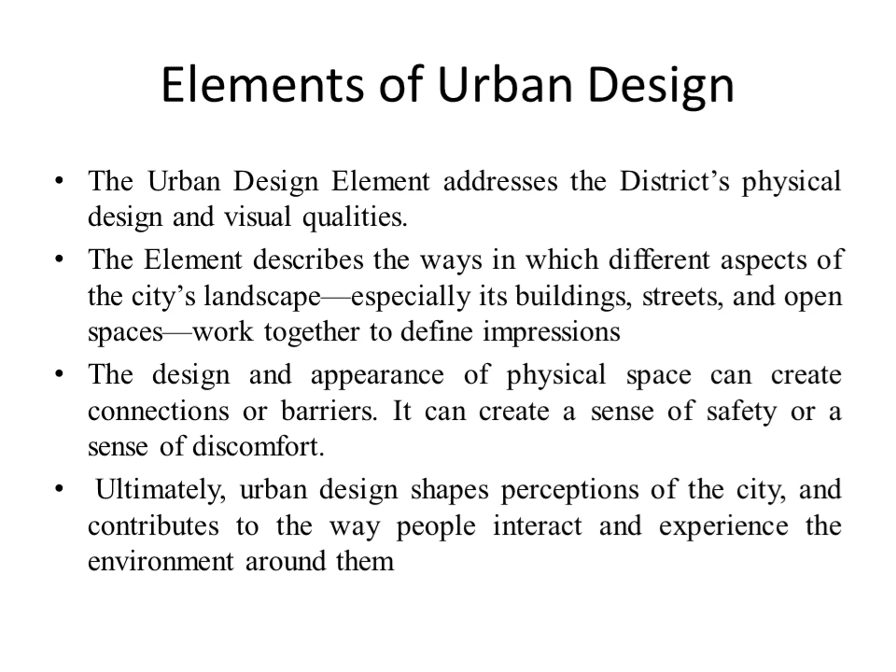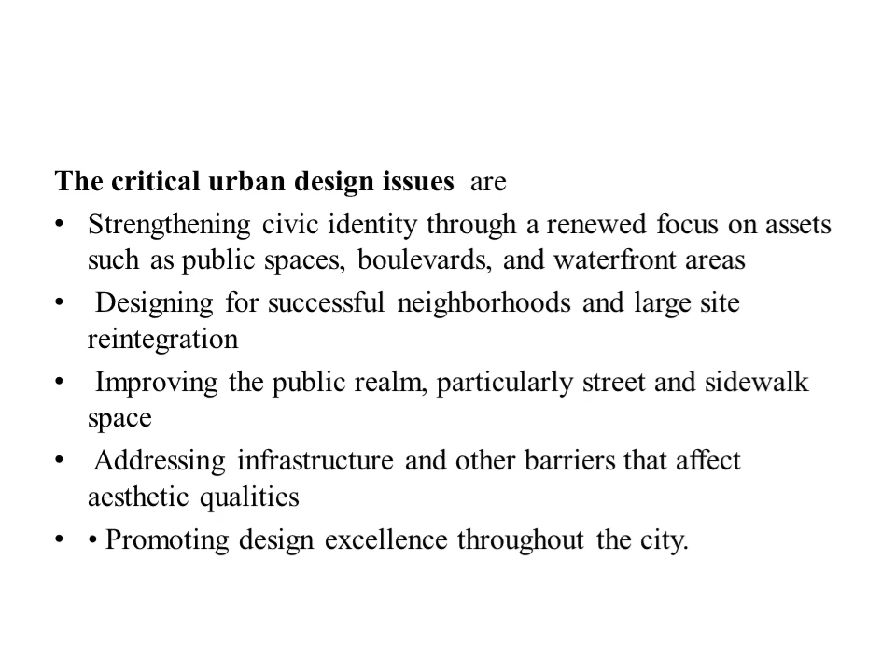The critical urban design issues are strengthening civic identity through a renewed focus on assets such as public spaces and waterfront areas, designing for successful neighborhood and large site reintegration, improving the public realm particularly street and sidewalk space, addressing infrastructure and other barriers that affect aesthetic qualities, and promoting design excellence throughout the city.

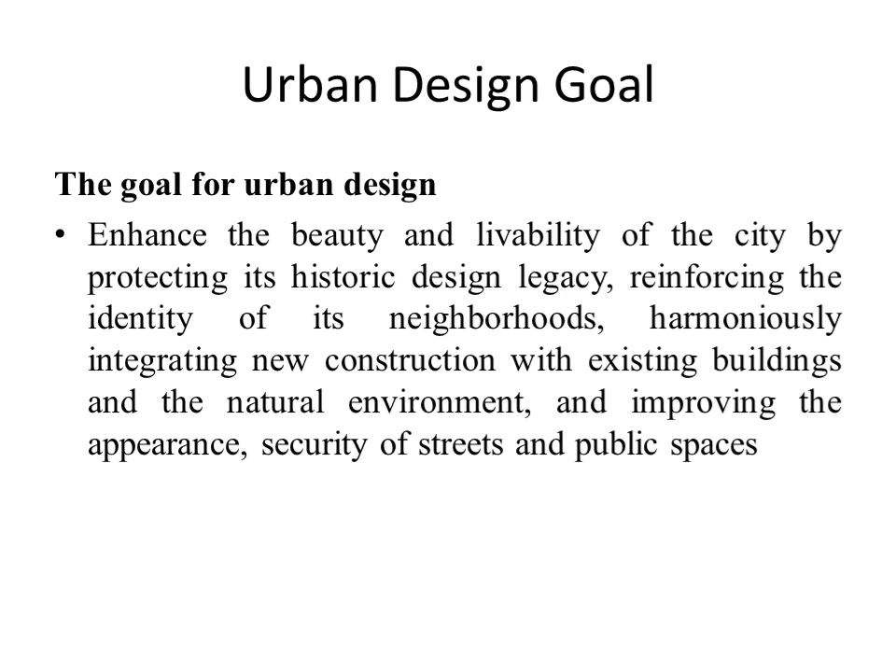Next we will see the urban design goal. The goal for urban design is to enhance the beauty and livability of the city by protecting the historic design legacy, reinforcing the identity of its neighborhoods, harmoniously integrating new construction with existing buildings and the natural environment, and improving the appearance and security of streets and public spaces.

The urban pattern and identity of the city as a whole can be achieved or maintained by protecting the integrity of the city's historic plans. Similarly, we can respect the natural topography and landform. This is also possible by improving the identity and design.

The urban pattern and identity can be enhanced by strengthening the boulevards and gateways and overcoming physical barriers.

Similarly, the urban pattern and identity of a city can be preserved through architectural continuity and design integrity of historic districts and other areas of strong architectural character.

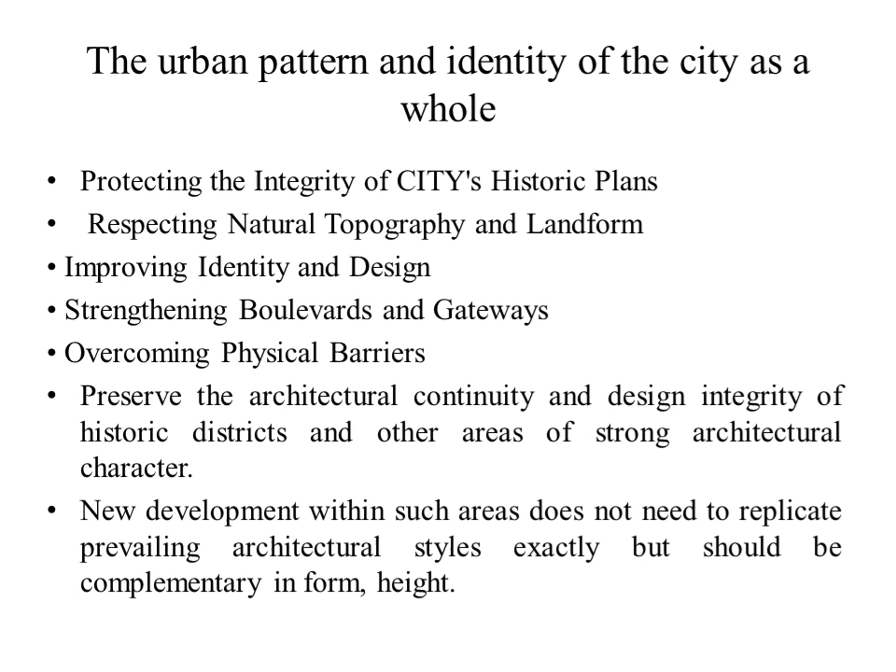New development within such areas does not need to replicate prevailing architectural styles exactly, but should be complementary in form and height. Further, it should create visual interest through well-designed building facades, storefront windows, and attractive signage and lighting.

Avoid monolithic or box-like building forms or long blank walls, which detract from the human quality of the street. Also encourage the use of shade trees and landscaping or screening of surface parking areas.

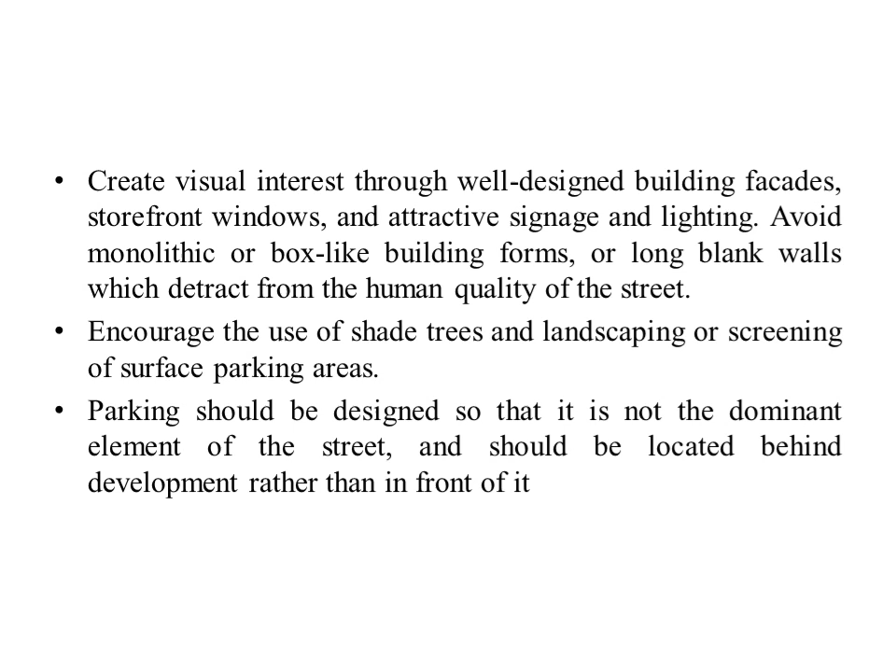Parking should be designed so that it is not the dominant element of the street, and should be located behind development rather than in front of it.

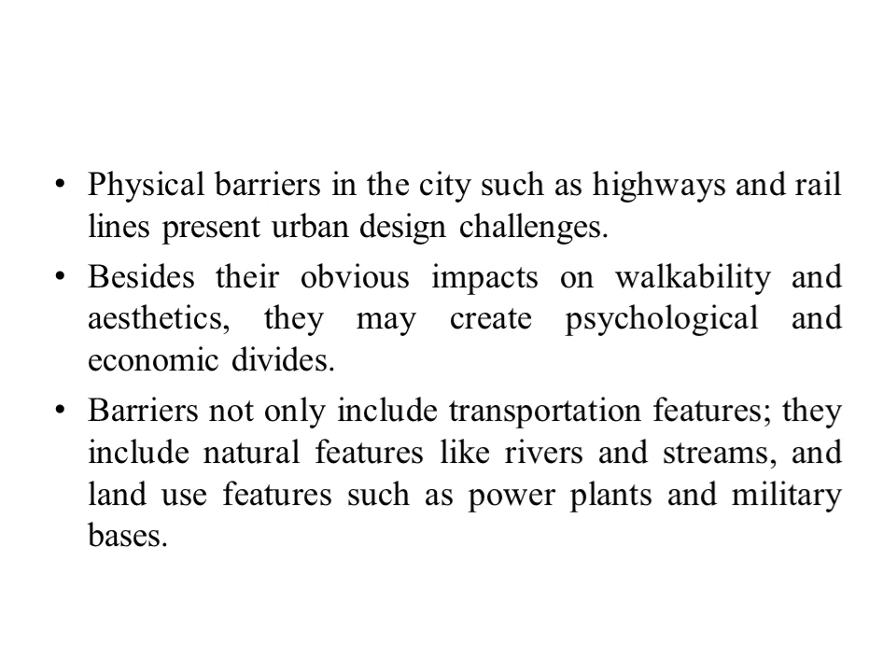The physical barriers in the city, such as highways and railway lines, present urban design challenges. Besides their obvious impact on walkability and aesthetics, they may create psychological and economic divides. Barriers not only include transportation features, but also natural features like rivers and streams, and land use features such as power plants and military bases.

In this slide, we are going to see the elements of a city plan. All the individual objects included in an urban area are the elements of the city plan. These objects include residential buildings, public buildings, parks, factories, roads, etc. Land includes built-up area and open land also.

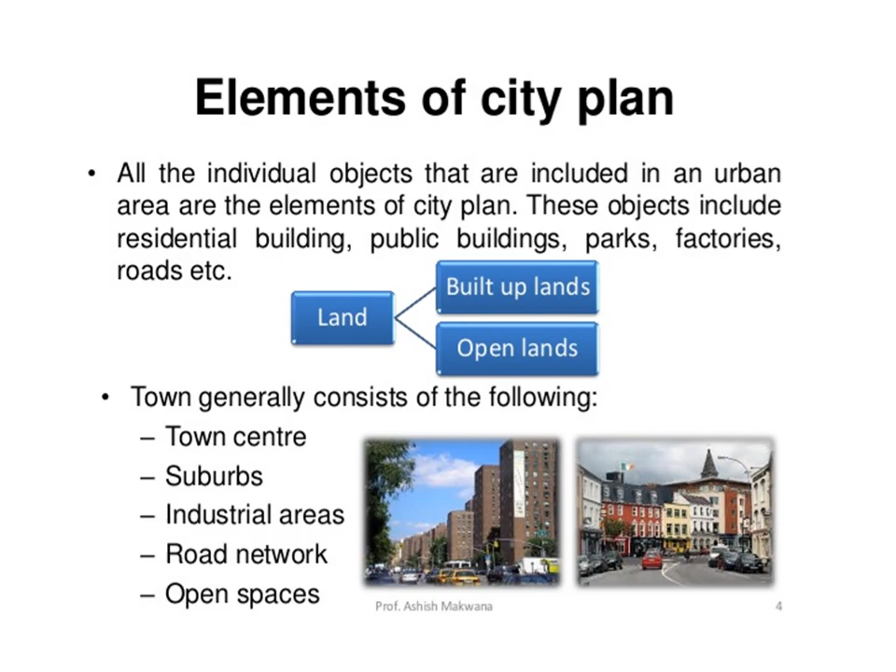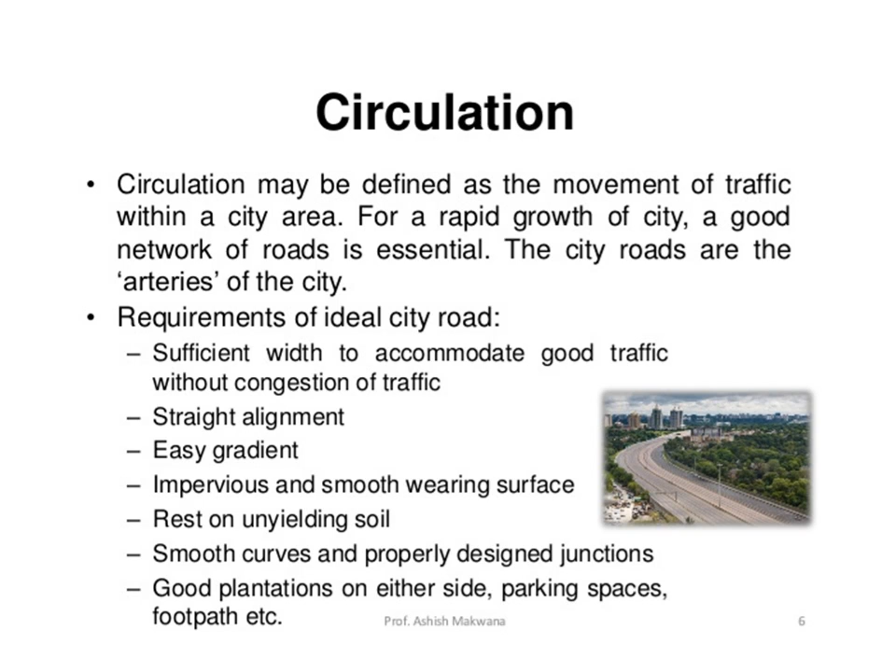Then the classification of urban roads: they are arterial road, that is main road, sub-arterial road, local roads, and other roads.

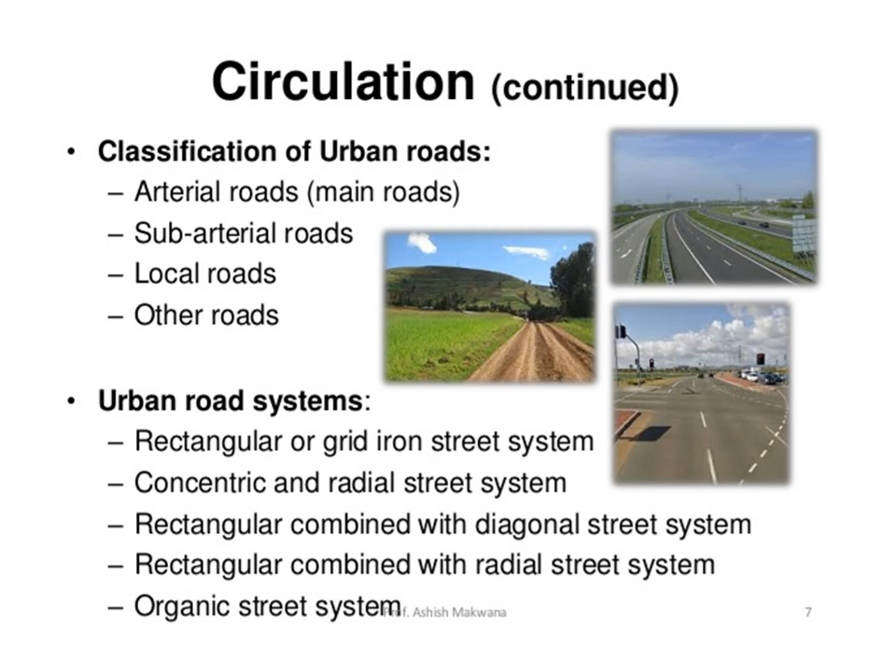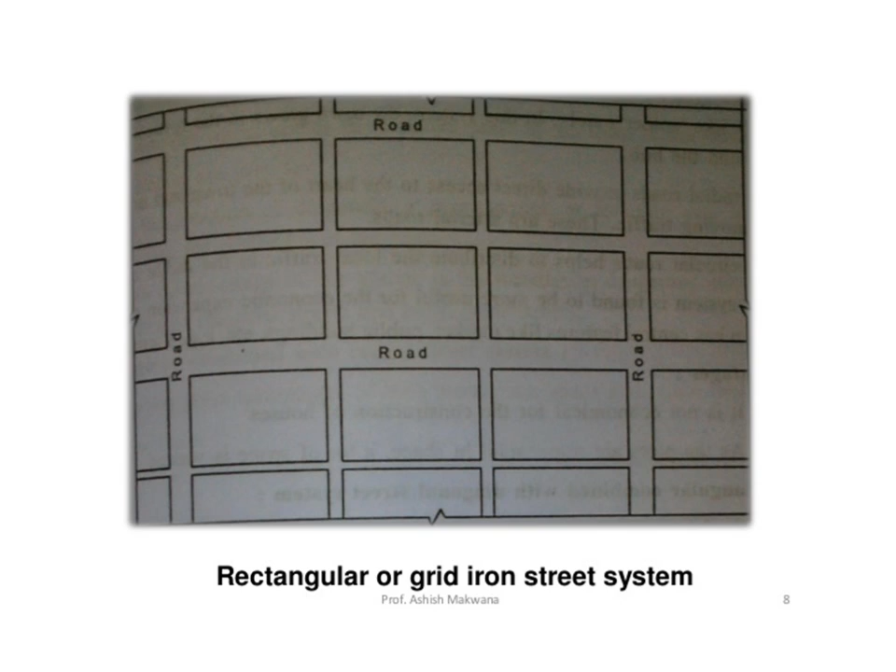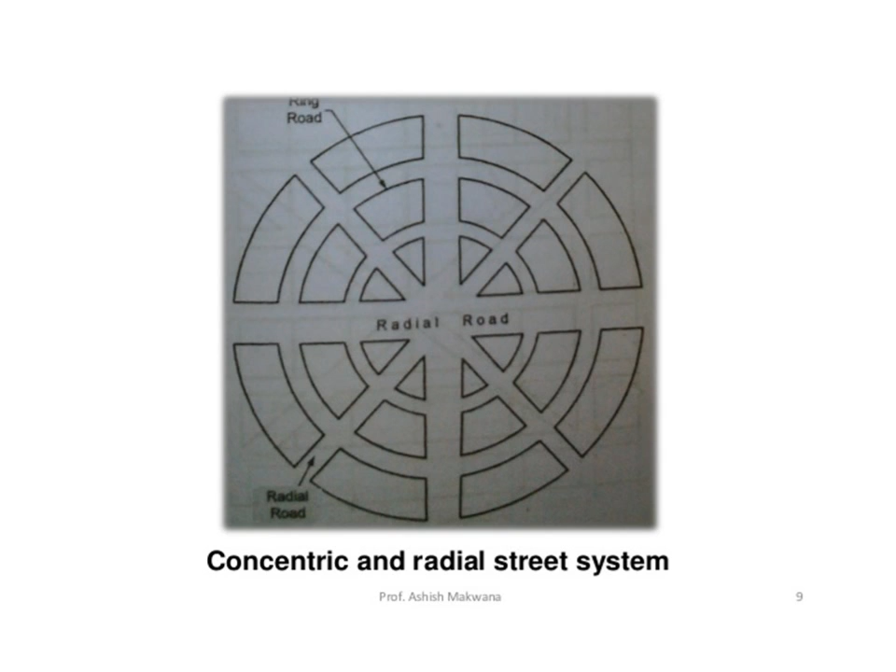This slide refers to the concentric and radial street system, where the central business district is located at the center, and concentric zones are provided from center towards the outskirts, joined by radial roads.

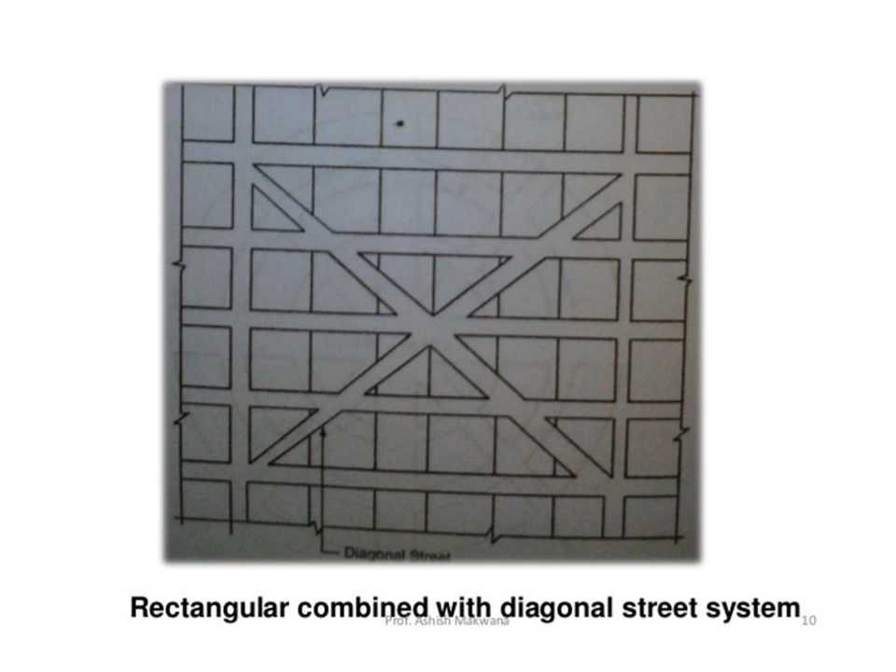This slide refers to rectangular combined with diagonal street roads, where roads run diagonally from the center and other roads are parallel to each other, connecting the different zones in the city.

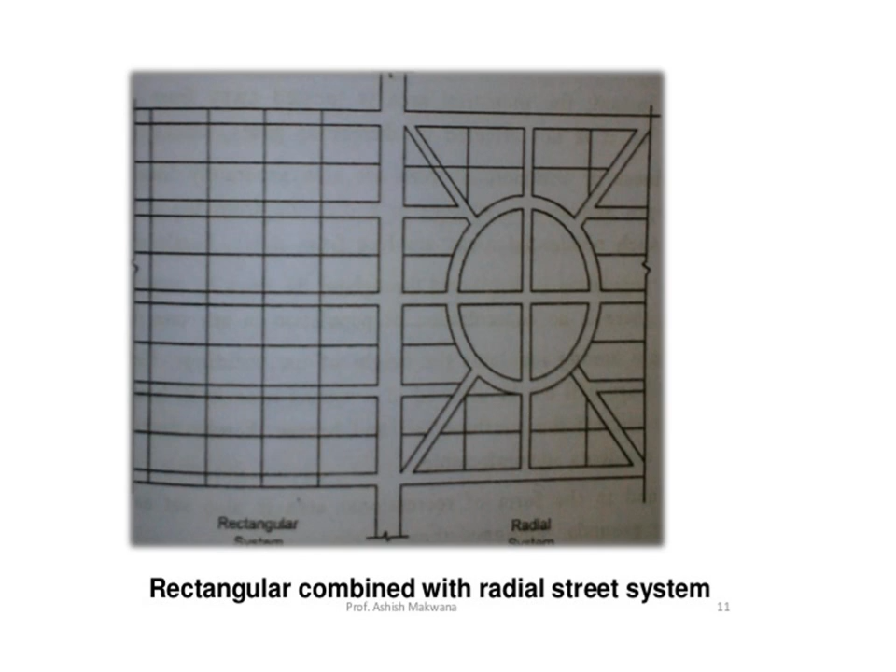This slide shows the rectangular combined with radial street system, in which on one side of the city the rectangular grid pattern is adopted, whereas on the other part the radial system is adopted, with the central business district provided at the center.

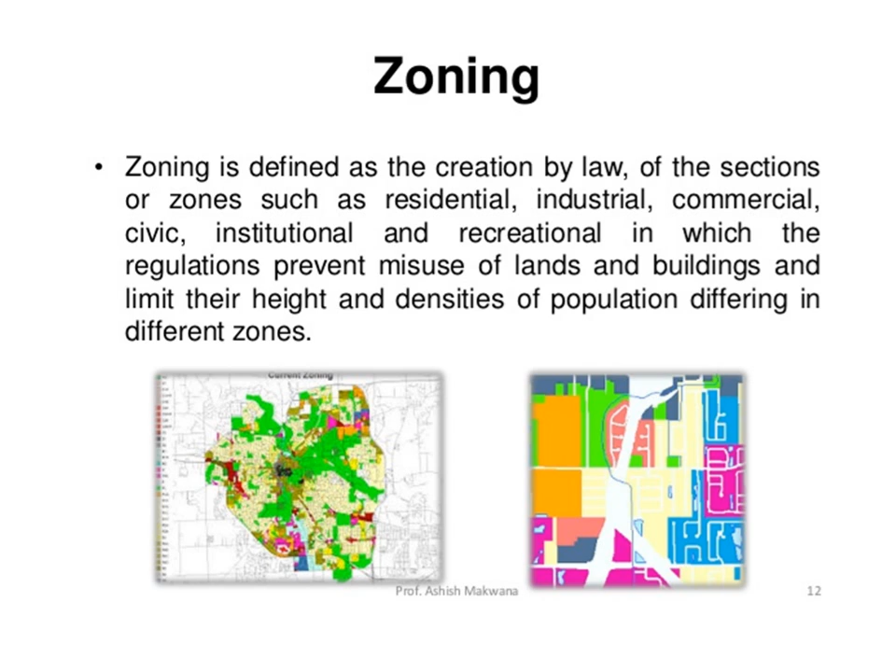Now we are going to see zoning. Zoning is defined as the creation by law of sections or zones such as residential, industrial, commercial, civic, and institutional, in which regulations prevent misuse of land and buildings and limit their height and population densities, differing in different zones, as shown in the diagram below.

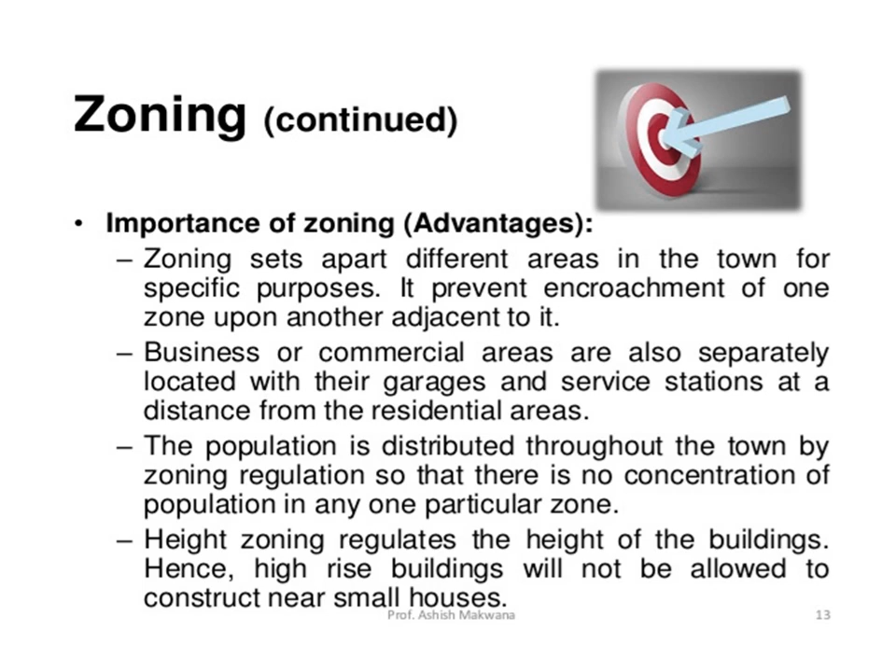Next we see the importance and advantages of zoning. Zoning prevents encroachment of one zone upon another adjacent to it. Business or commercial areas are separated, with garages and service stations located at a distance from residential areas. Population is distributed throughout the town by zoning regulations so there is no concentration in any one zone. Height zoning regulates building height, so high-rise buildings will not be allowed near small houses.

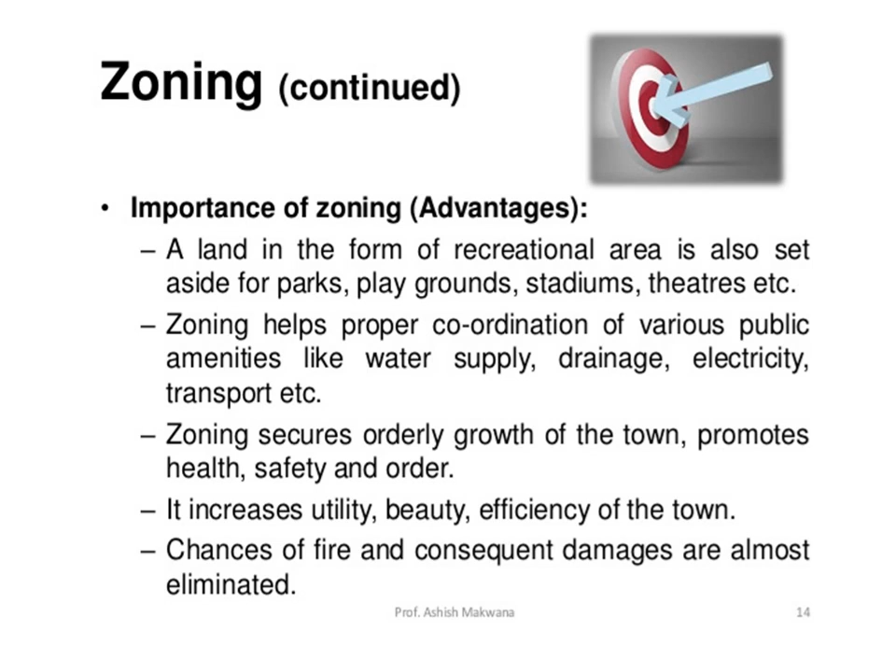Further, land is set aside for recreational areas like parks, playgrounds, stadiums, and theatres. Zoning also helps proper coordination of public amenities like water supply, drainage, electricity, and transport. It secures orderly growth of the town, promotes health, safety and order, encourages utility, beauty and efficiency, and reduces chances of fire and resulting damage.

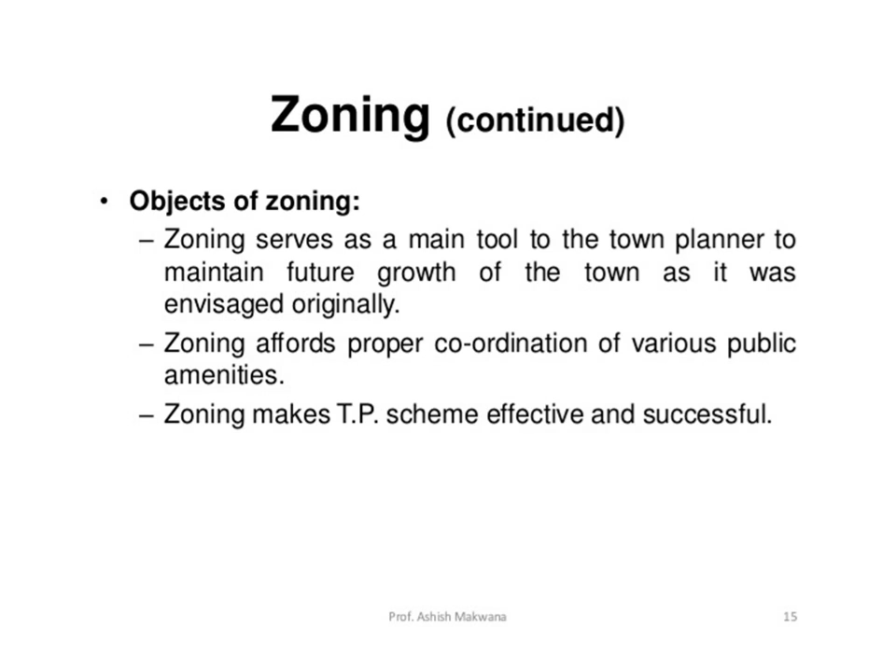Now we see the objectives of zoning. Zoning serves as the main tool for the town planner to maintain future growth of the town as it was envisaged originally. Zoning affords proper coordination of various public amenities and makes town planning schemes effective and successful.

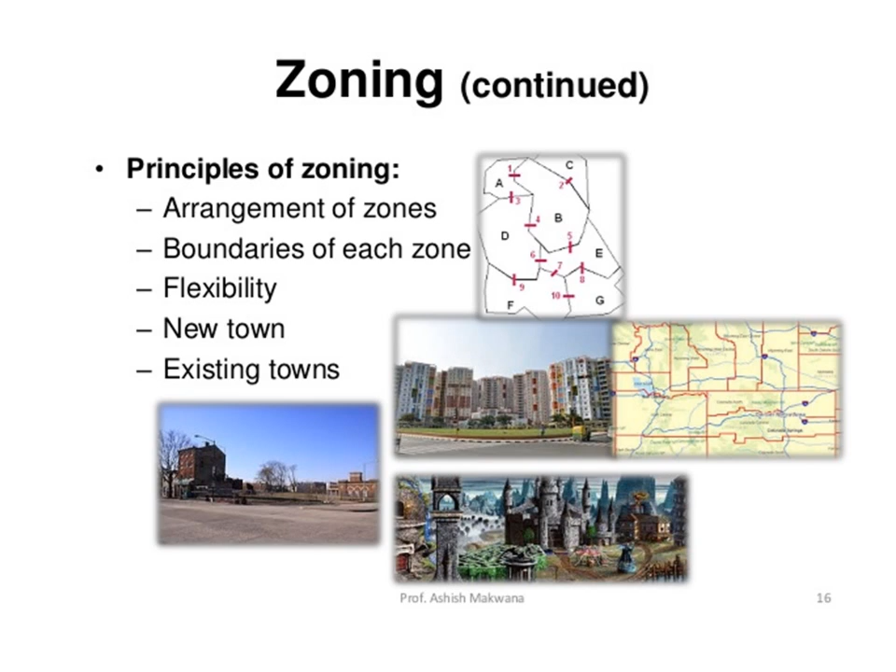In this slide we see the principles of zoning. It includes the arrangement of zones, boundaries of each zone, flexibility, and considerations for new towns and existing towns.

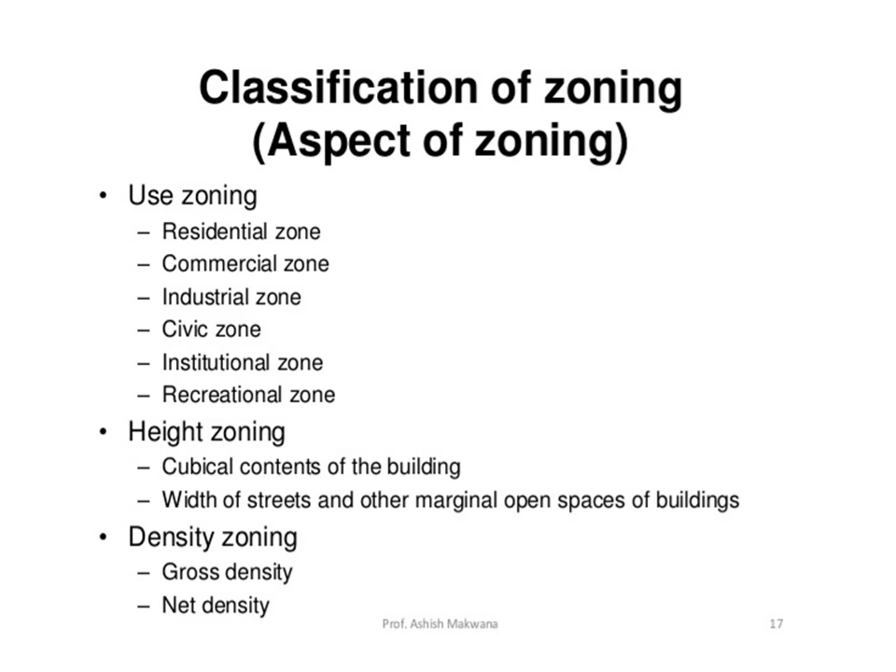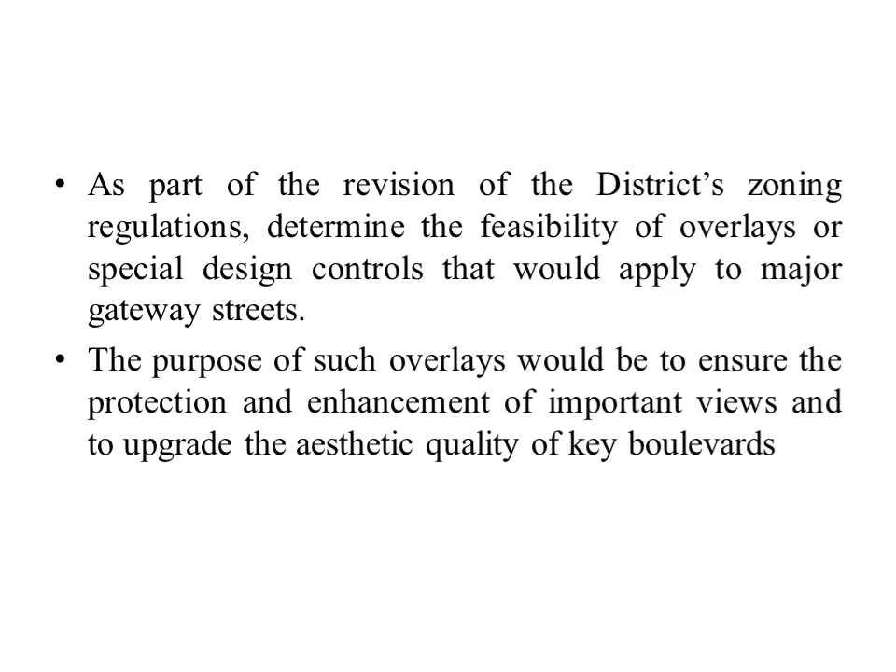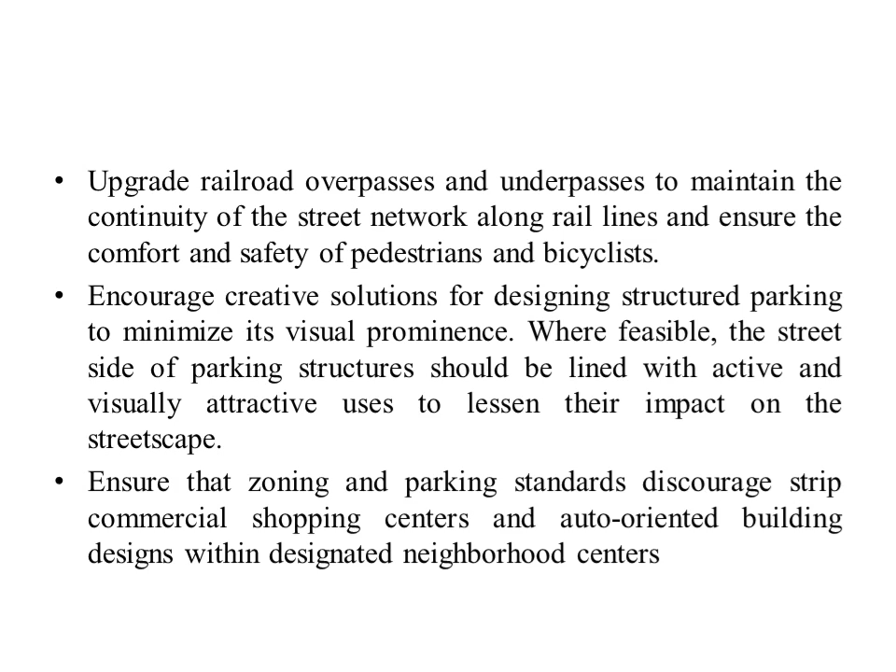Further, the design of street space affects pedestrian safety and comfort. Changes to street and sidewalk width, parking configuration, crosswalks, intersections and signals can improve the pedestrian environment. Well-defined edges and limited openings create a sense of enclosure which can make a street more animated and comfortable.

Also, street trees, street furniture, benches, trash receptacles, and lighting, along with well-designed buildings and active ground floor uses, contribute to the experience of walking, cycling and driving. Planning for streets and sidewalks must recognize the value of such spaces as public amenities, especially in high-density neighborhoods lacking access to parks, open spaces and yards.

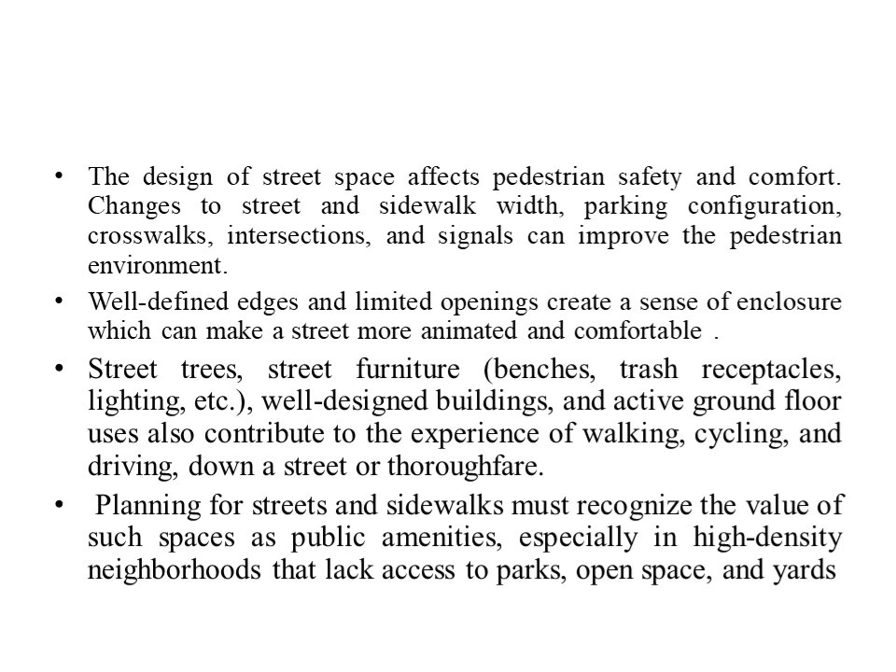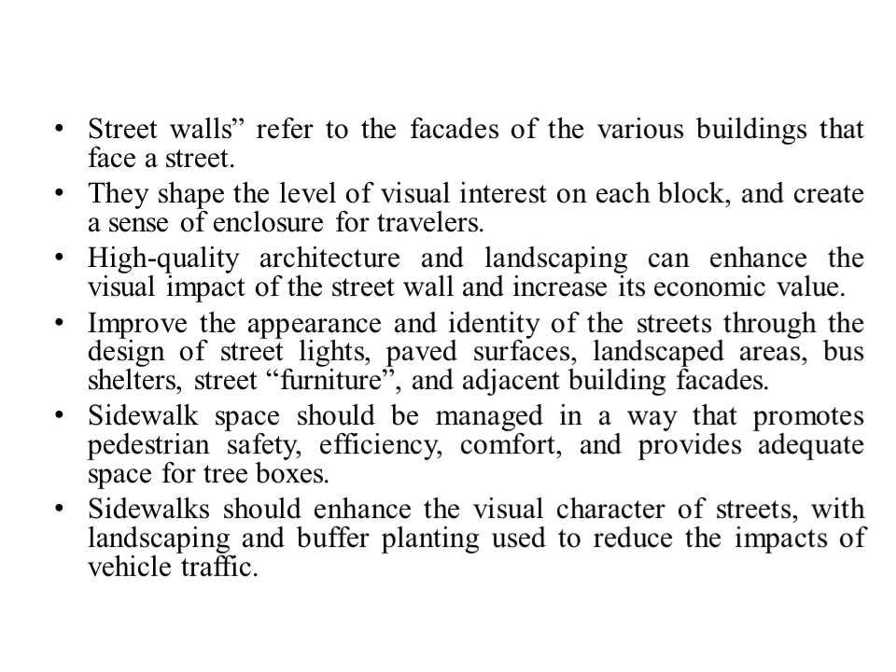So in this video lecture, we have considered the elements of town planning and how they affect the design of a town.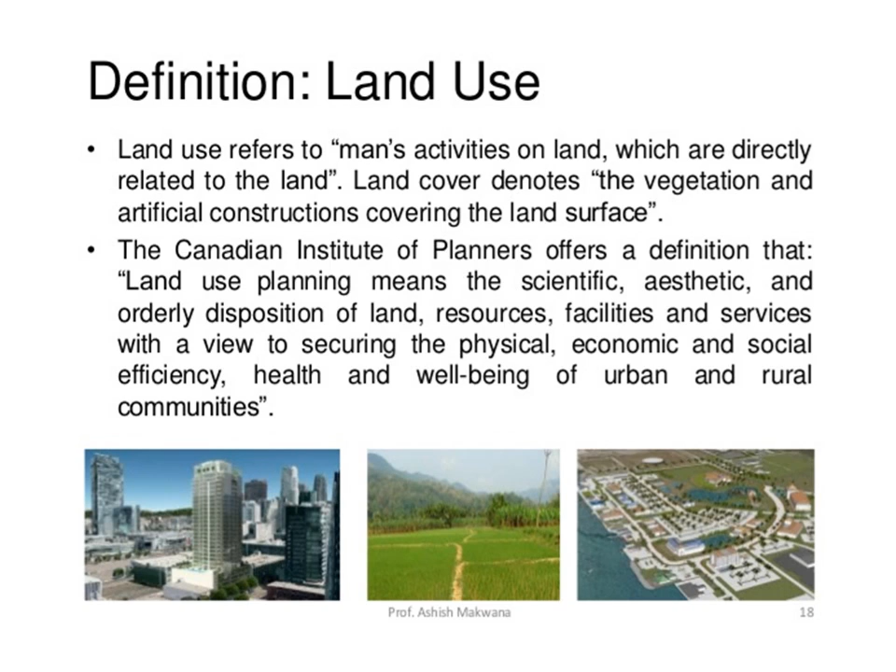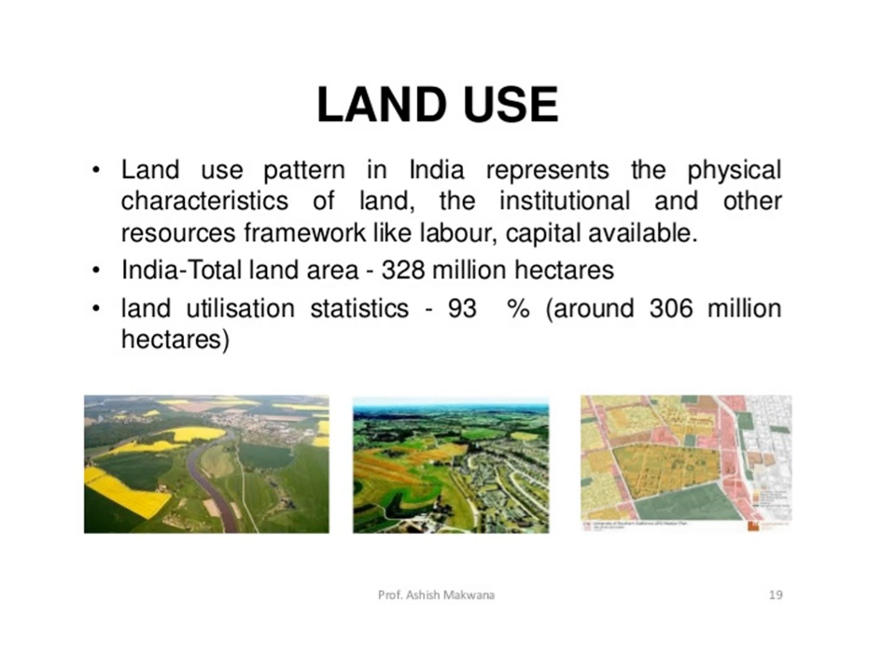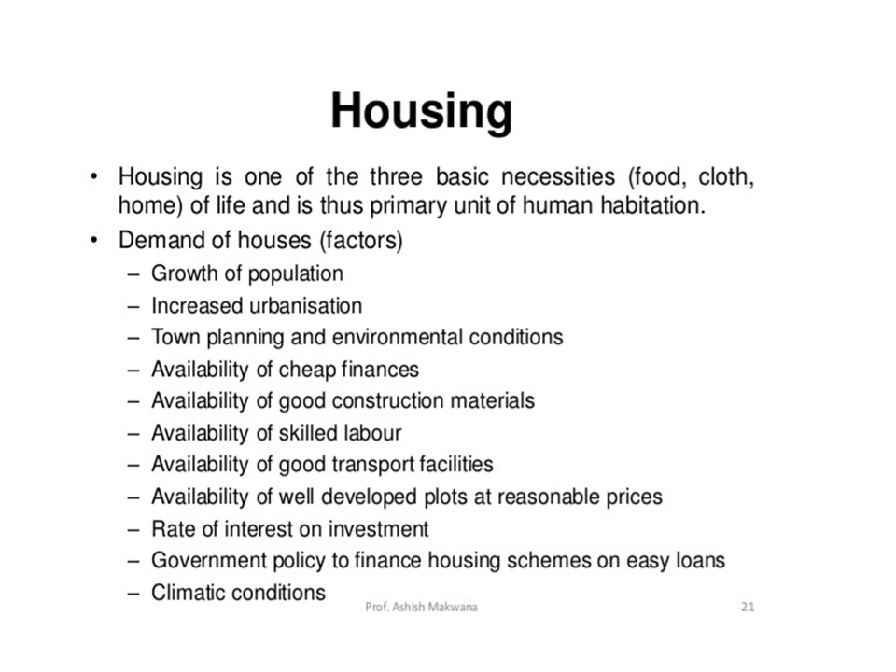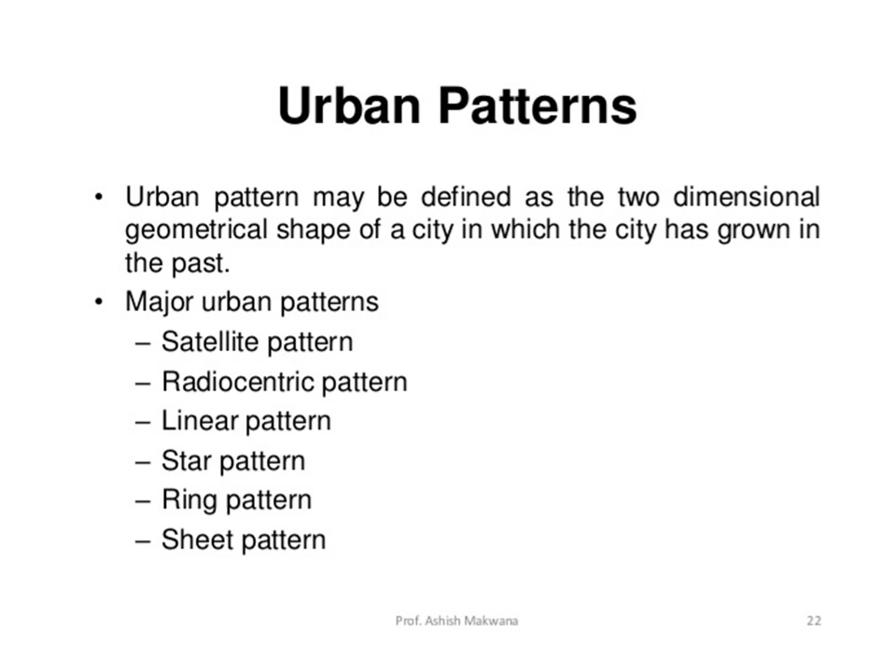The street wall refers to the facade of various buildings that face a street. They shape the level of visual interest on each block and create a sense of enclosure for travelers. High quality architecture and landscaping can enhance the visual impact of the street wall and increase its economic value as well.

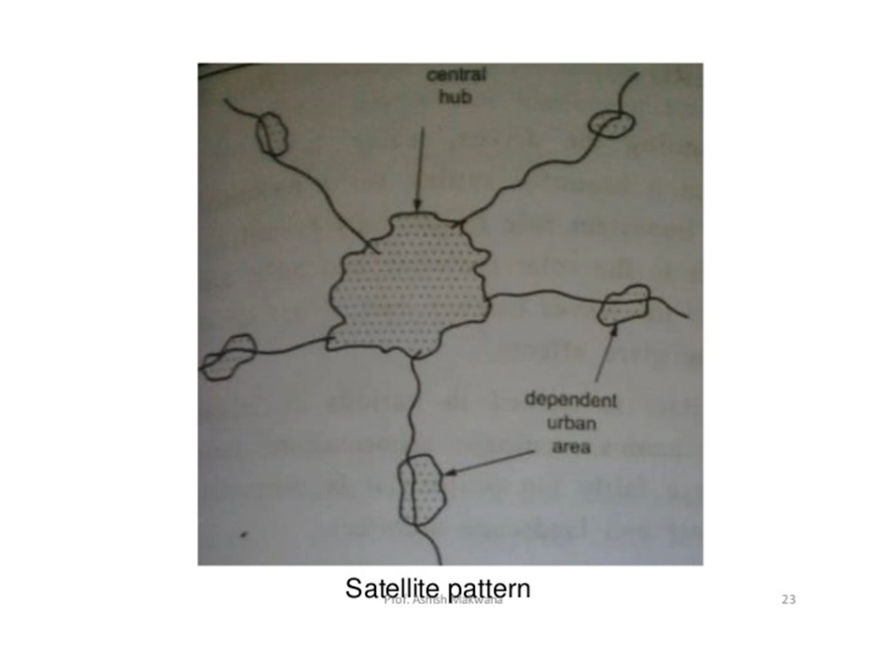This slide refers to the radiocentric pattern, in which the parent city is located at the center and radial lines or radial roads are provided from the center towards the outskirts of the city.

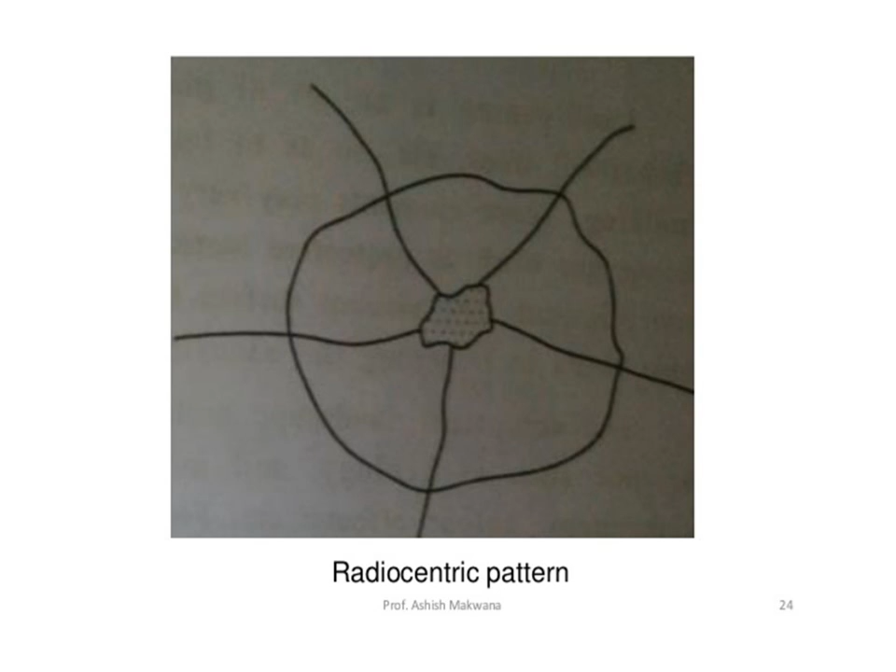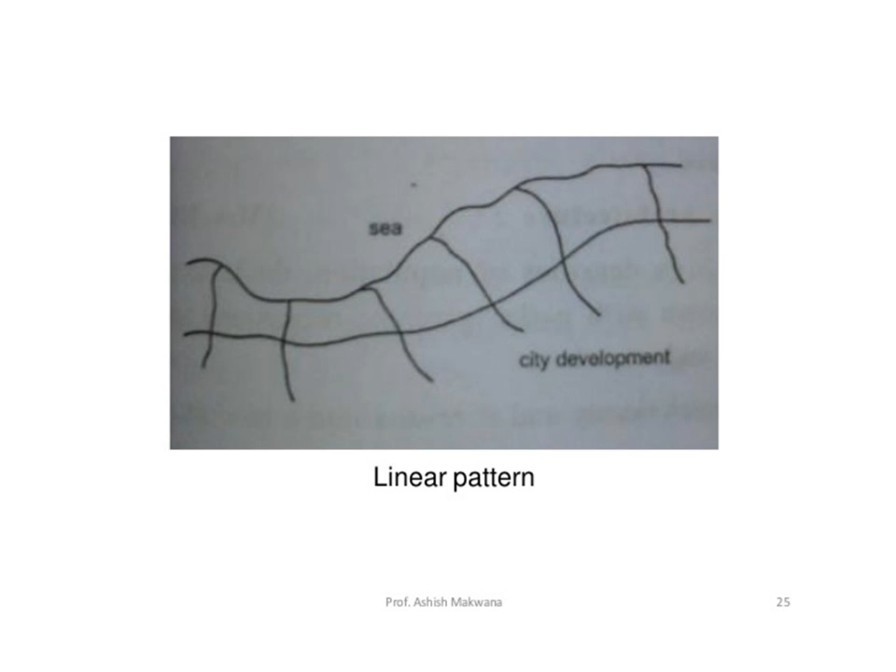Further, physical barriers in the city such as highways and railway lines present urban design challenges. Besides their obvious impact on walkability and aesthetics, they may create psychological and economic divides. Barriers not only include transportation features, but also natural features like rivers and streams, and land use features.

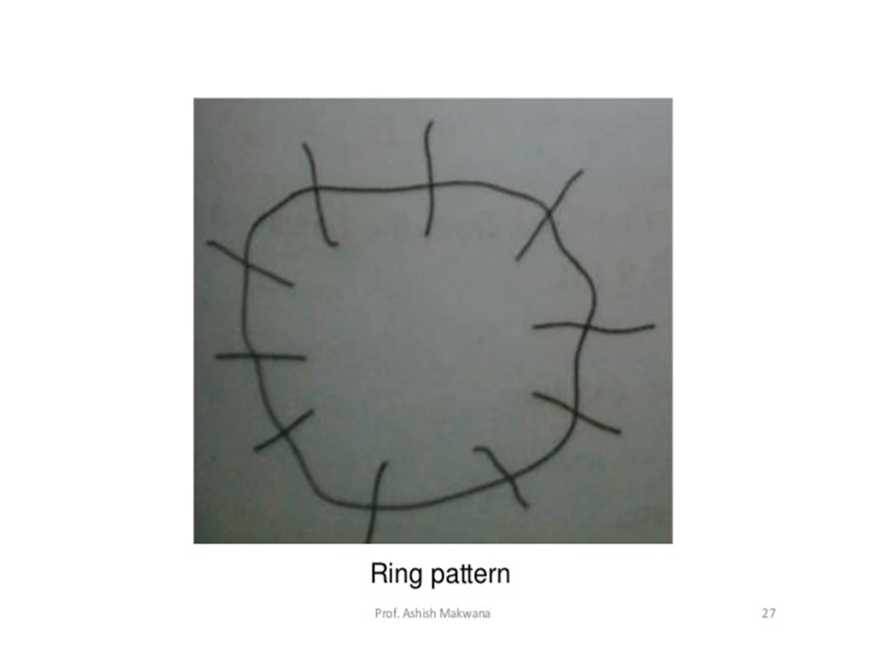Further, the physical barriers in the city such as highways and railway lines present urban design challenges. Besides their obvious impact on walkability and aesthetics, they may create psychological and economic divides. Barriers not only include transportation features, they also include natural features like rivers and streams, and land use features such as power plants and military bases.

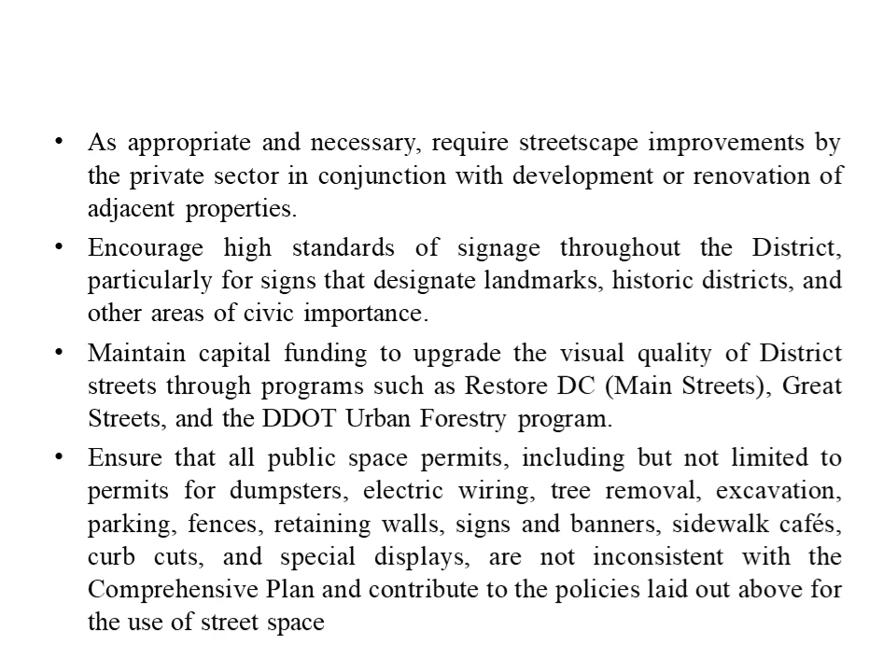Ensure that all public space permits, including but not limited to permits for dumpsters, electric wiring, tree removal, excavation, parking, fences, retaining walls, signs and banners, sidewalk cafes, curb cuts, and special displays, are not inconsistent with the comprehensive plan and contribute to the policy laid out above for use of street space.

Further, land in the form of recreational area is also set aside for parks, playgrounds, stadiums, theatres, etc. Zoning also helps proper coordination of various public amenities like water supply, drainage, electricity, transport, etc. Zoning secures orderly growth of the town and promotes health, safety and order. Zoning increases the utility, beauty and efficiency of the town, and reduces the chances of fire and consequent damages to almost nil.